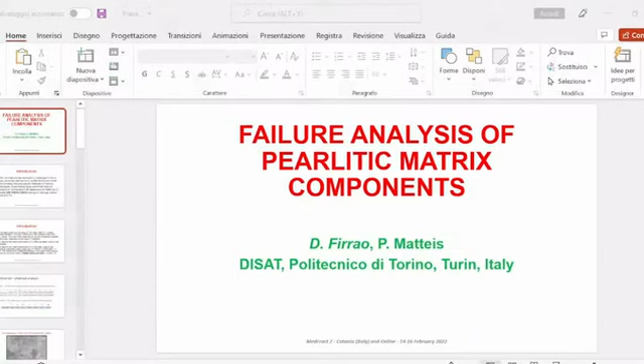Mine is about the same thing, pearlitic matrix components. As you can see, these pearlitic microstructures are very complex to tackle when you are trying to assess if a fatigue fracture is in place. Since many important fractures happen, think of cable cars, ropes that break, we have to find a very simple method to assess this type of fracture.

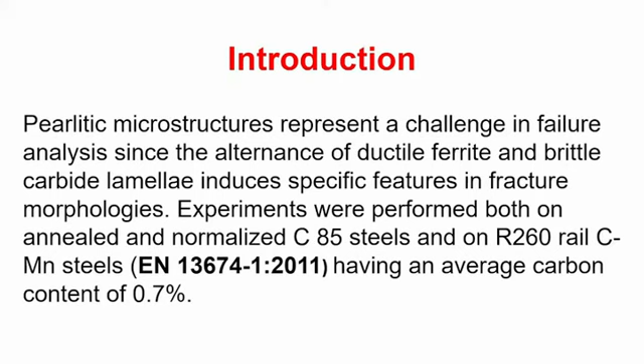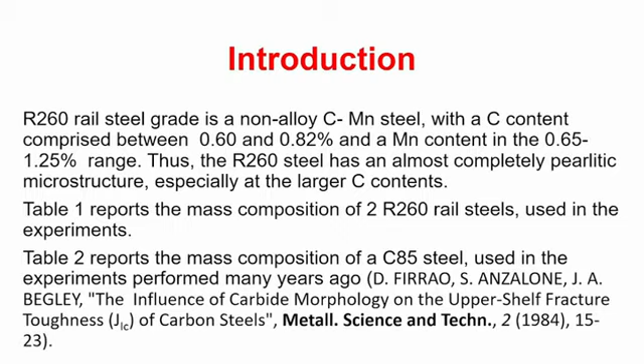We use two types of steel. One is a rail steel with an average composition of 0.7 carbon. We also went back 40 years to work done on C85 steels. Well, it was actually a 1085 because it was bought in America, in the United States. In both cases, if you look at the composition, nothing spectacular.

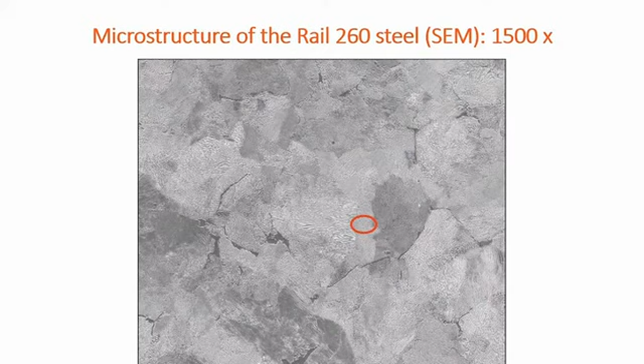When you use a scanning electron microscope to look at the microstructure of pearlite, you have to go to very high magnifications to understand something. This is a metallographic surface etched with Nital, so the ferrite is consumed, and the cementite is the one that stands out. Here the white platelets are the cementite, but you have to go to 25,000X to really see something.

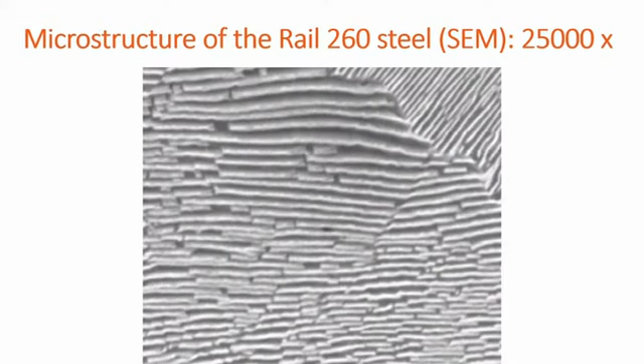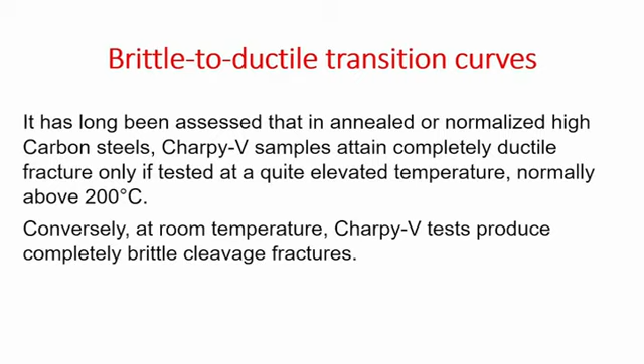Also, pearlite has a very dangerous, as I say, brittle-to-ductile transition curve. Only at temperatures above 200 degrees C can you see some real ductile fracture. At room temperature, about 20 degrees C, and also in the region between minus 10 to plus 50, the energy absorbed is just the same, very low.

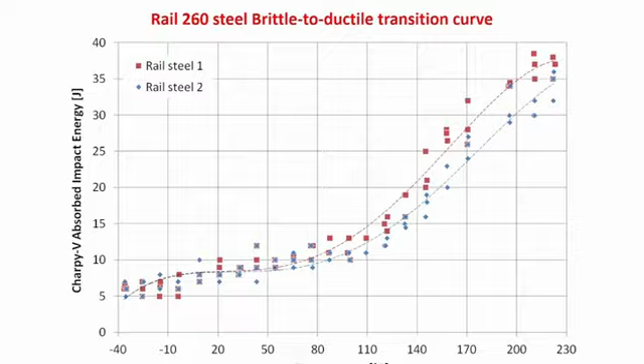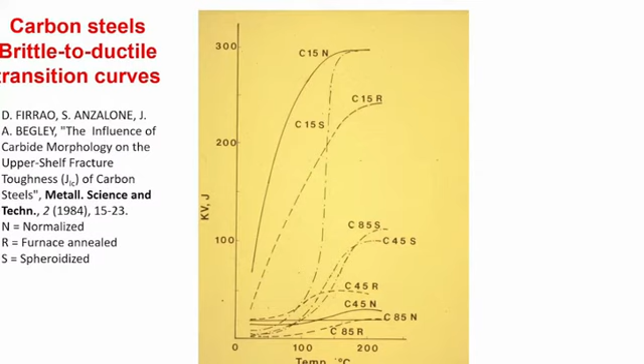While taking into consideration various curves, you see a real transition when you look at a 0.15 carbon steel. But when you go to 0.45 and then to 0.85, you get even at the highest temperatures very low absorbed energy. Please consider that R means 'furnace annealed' - it is the Italian 'ricotto'.

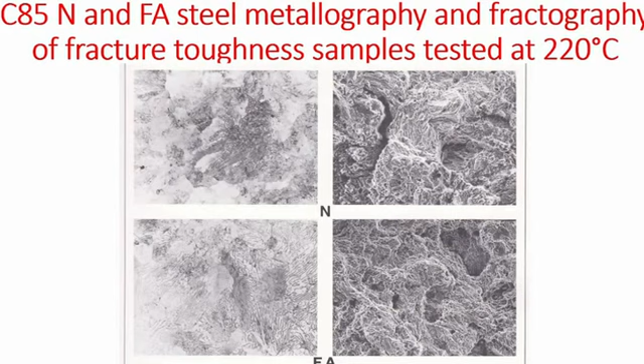When you go to high temperatures and look at the fractographs of a C85 steel, you can see that this is for sure a ductile fracture surface. And if you go to higher magnification, you can see that C85 steel has ferrite crystals that have been elongated. Cementite crystals are at the bottom; they appear very dark. Also, in the case of a C45 steel, ferrite isn't able to develop a fully ductile fracture because of constrained ductility due to the fact that it is interspersed with very high colonies of pearlite.

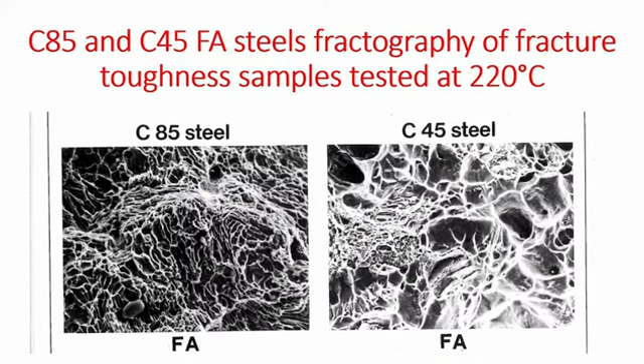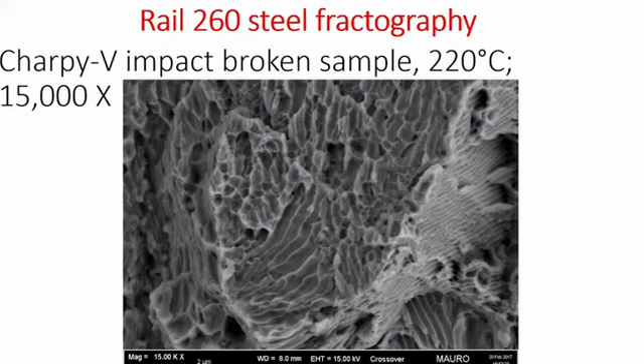With modern SEMs, you can see better what happens at 220 degrees C when you have a Charpy-V impact broken sample of rail steel. But when you go to low temperature, the same steel, you can really see that it is definitely a brittle fracture, a brittle cleavage fracture.

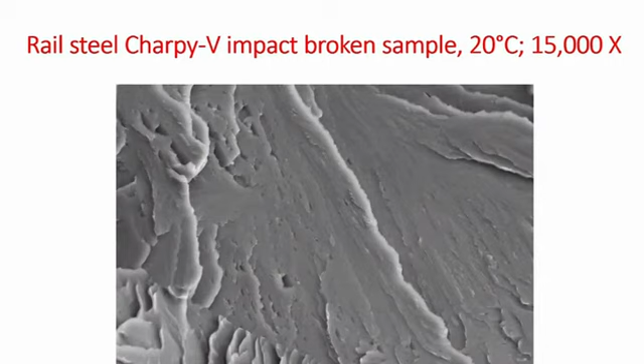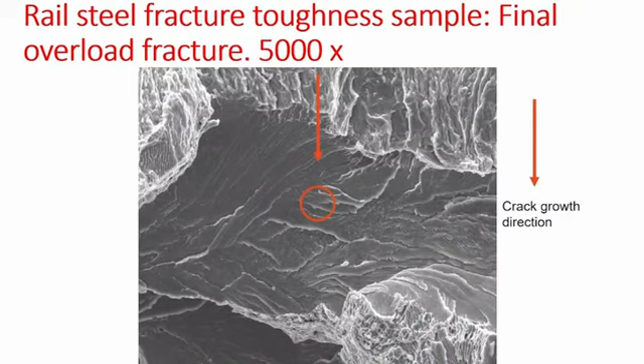This is at the maximum speed, as I can say. When you reduce a little bit the speed, you still have almost all cleavage fracture. So you can be sure that at room temperature, you should see cleavage fracture, very brittle. But if you have fatigue, then something happens.

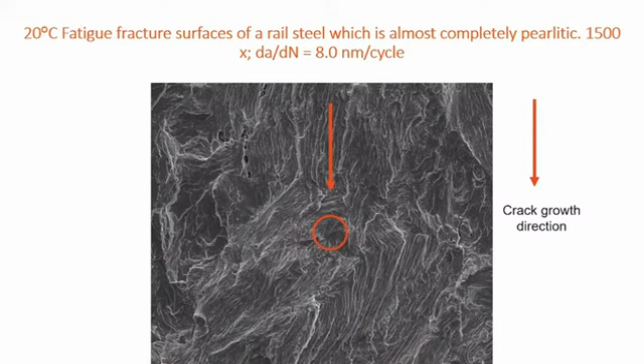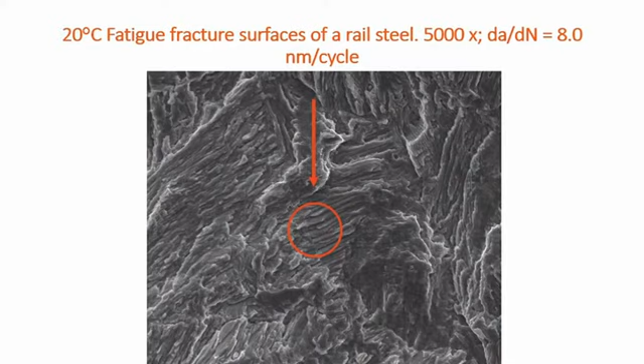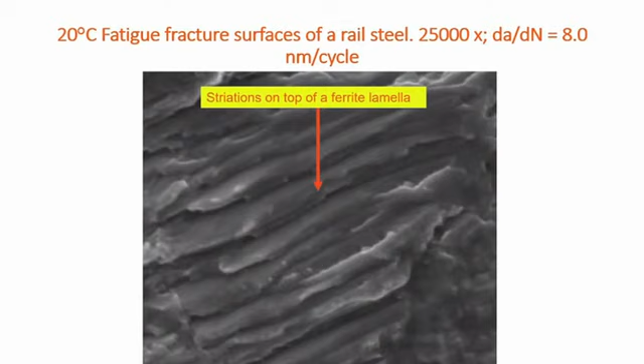This is the fatigue, and for sure this is not a very brittle surface. As you increase magnification, you can see that again, in a different way, ferrite crystals stand out from the bottom. And if you look at very high magnification, you can even see striation on top of a ferrite lamella.

So what's your conclusion? If you take a high carbon steel component that has been broken at room temperature or at a slightly different temperature, and if you discover that there are some ductile fracture features, you have to conclude that it was a fatigue fracture, which makes things very simple.

You work at not so high magnification because sometimes the samples have not been prepared properly - they have been oxidized by the environment - and you look for features. Do you see some ductile features? Then it has been fatigue. Thank you very much.